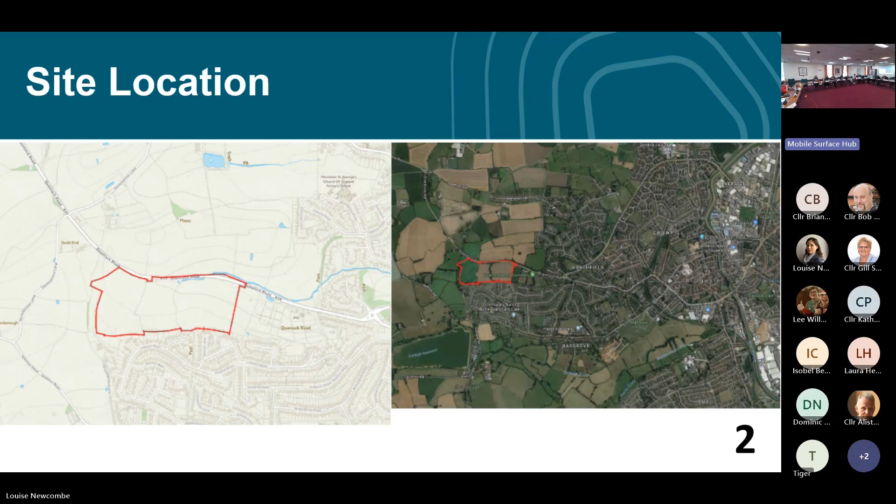This plan shows the current policy position, the fact that it is allocated within the local plan, and that development has commenced to the north. This forms the southern section of the site, showing the proposal in the overall scale of development currently underway.

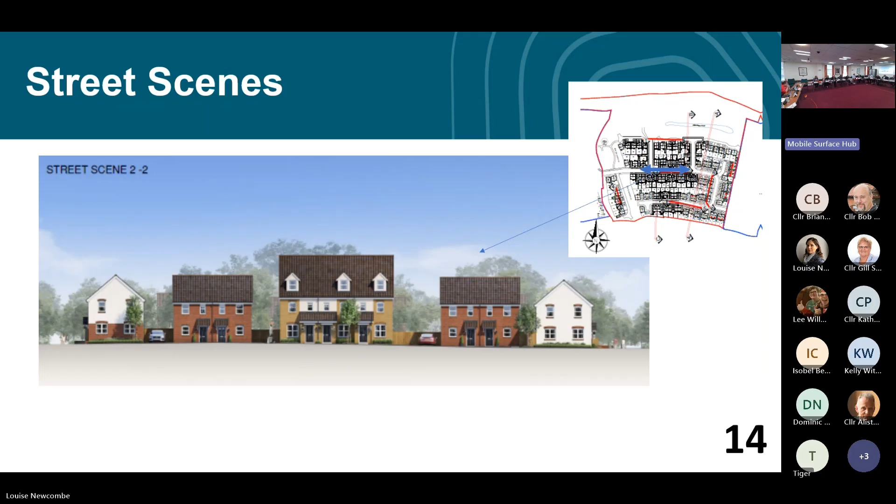The next plan we move on to is street scenes. This street scene is shown through part of the middle of the site, where the 2.5-storey dwellings are predominantly located. It shows an array of units of various sizes and types. The blue arrow on the plan inset shows that this street scene forms the central area of phase 1 of the application site.

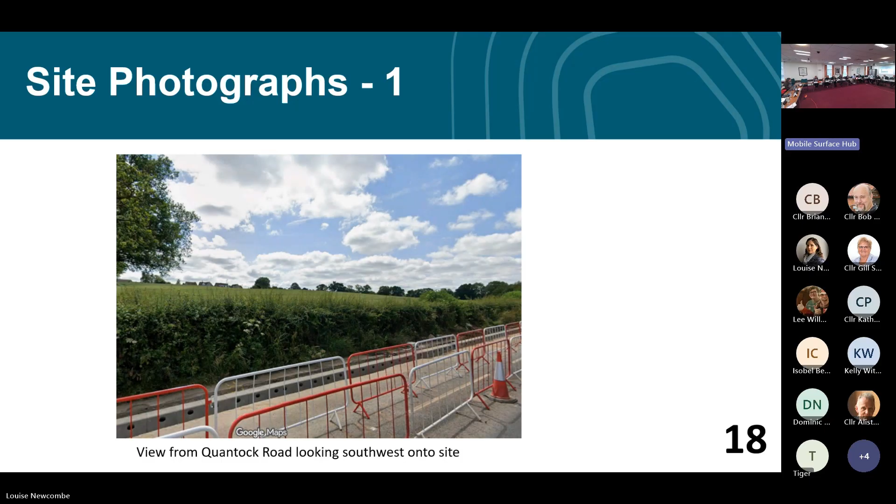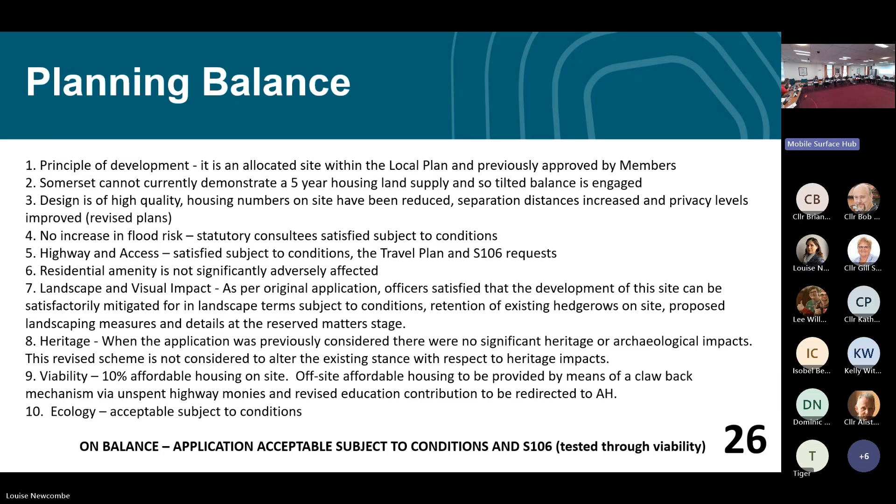In terms of ecology, we had revised plans submitted with respect to updated survey information and a dark corridors plan, and ecology are now satisfied subject to conditions. On balance, we consider this application to be acceptable subject to conditions and the Section 106, which was tested through viability. There are no updates to the report as shown to members.

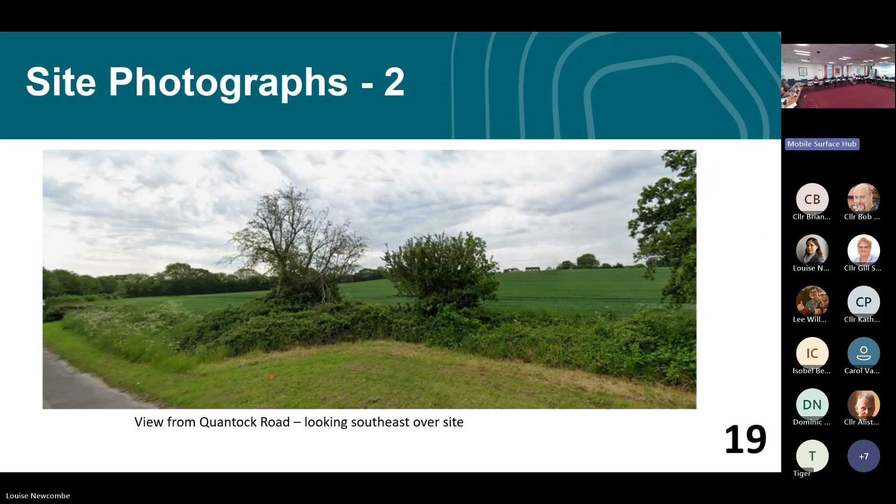First one's a clarification with regard to the 2.4 million, or whatever it was, that was set aside for education. I believe it was on your final slide where there was some calculation made - let's call it 2.4 million that was allocated and then minus 2 million. Can you just clarify what those numbers mean again please, and how much will end up actually in the education pot at the end of it, just for my benefit?

I'll just find the slide for you. So the bit in bold at the bottom.

So as of this year, 2025, education came back as a consultee to say that their costs have gone up. The initial request in 2021 had gone up from 2.24 million to 4.241 million - so between 2021 and 2025, that's how much the education cost had increased. However, in terms of viability, it was recognised that the policy compliant level of affordable housing couldn't be reached, so it was affordable housing that were taking the hit.

From a viability perspective, education were getting their ask, but affordable housing were not. So there was a big discussion around how we could help improve, increase, enhance the affordable housing provision. In combination with senior officers from Somerset, the education team and the affordable housing team, we sat around the table and thrashed it out as officers to see what we could do. The consensus, the agreement with the education team, was that they would forfeit their additional ask between the four years - between 2021 and 2025 - take the 2 million off, so that the education ask is the original 2021 ask.

And that additional 2 million that they were seeking would be put towards off-site affordable housing contributions, and it would be included in a Section 106 agreement - so it wouldn't be anything loose, it would be all done legally, bound, signed and sealed as part of that agreement.

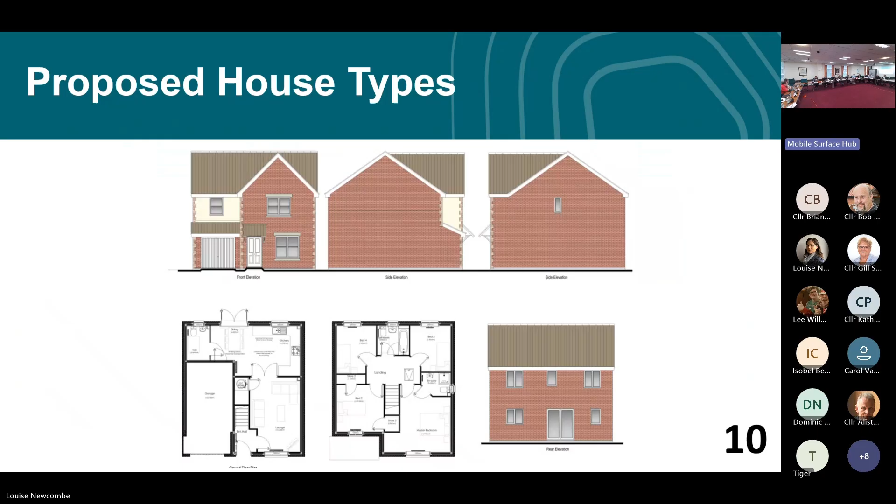It runs more centrally because it goes to the safe signalised pedestrian crossing point, which then leads to further pedestrian and cycle connections being delivered by the northern land parcel. So those connections to the wider area will exist in the future. It's still under construction, so they're not there yet, but the intention is they will be, and the layout of this development has been organised to try and follow that as well.

Thank you. Councillor Bruce.

Not sure if Councillor Phil was before me. Okay, thank you. First of all, apologies for being late today.

I'm gutted because I really wanted to vote on this. I think there comes a point, if I may, when we need to say that we've got to stop giving approval to housing without putting the right infrastructure in place. I'm really, really concerned about this. I've gone through the planning application letters from education and from the NHS, and I'd just like to read them out. Is that okay, Chair? Yes.

Just some sections of them. So in terms of the NHS, when the application was first registered, there was already a direct and identifiable impact on the local primary care provision.

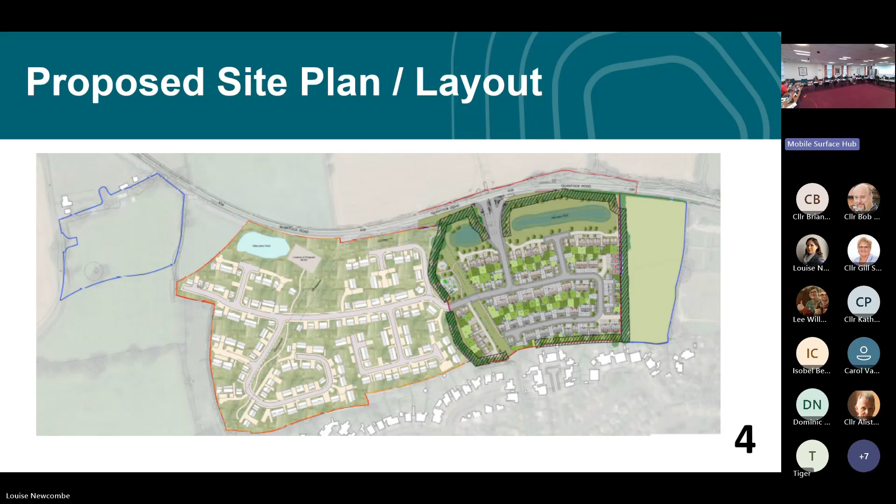Have there been any discussion, and I might be upsetting the local parish council at this point, but I don't know, so I'll just go for it - about redirection of that footpath? Because as mentioned, where it currently sends people over the road is not where the crossings are going to be. If you rerouted it, you could have a much better route through what's being built up, properly lit and not affecting your dark corridors for your nature as well. It just seems to have what was a historic route through what is no longer going to be there. Why hasn't it actually been looked at as a rerouted footpath route?

So on the 2 points - I think the area for spending affordable housing sums is currently linked to the former district geographic areas, so local contributions would go within the former Sedgemoor district area. In terms of the footpath, I think as a matter of course, if this application gets approved, there would be a diversion order applied for, because you'd end up having houses and back gardens going through what is the existing route.

So that said, the internal layout does accommodate for safe pedestrian links from the north to the south and vice versa. As I said earlier, the one bit that's missing is probably the actual connection point from the turning head closest to where the existing access point is. But I think following the debate from members, if that's something members want to push, we can push that through the 106. It would be subject to a diversion order to the extent that it's within the red outline of this site, but we obviously can't divert it outside the red outline of this site.

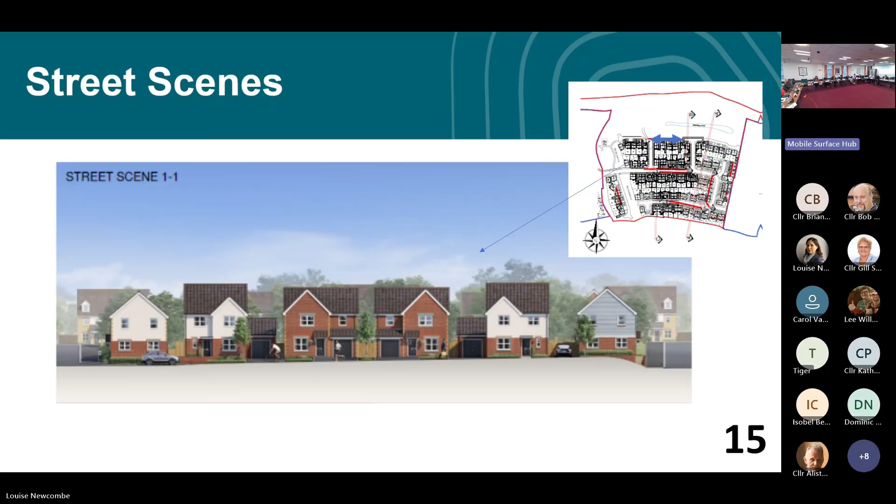Yeah, okay. And so is that something that could be brought up in conversation with the developers during the process? Yeah, in terms of this particular site - I know the issue is almost the dissection of this site from the wider area, but we have to, because we can only consider the applications before us. In terms of the site entrance, I've gone through that quite a lot.

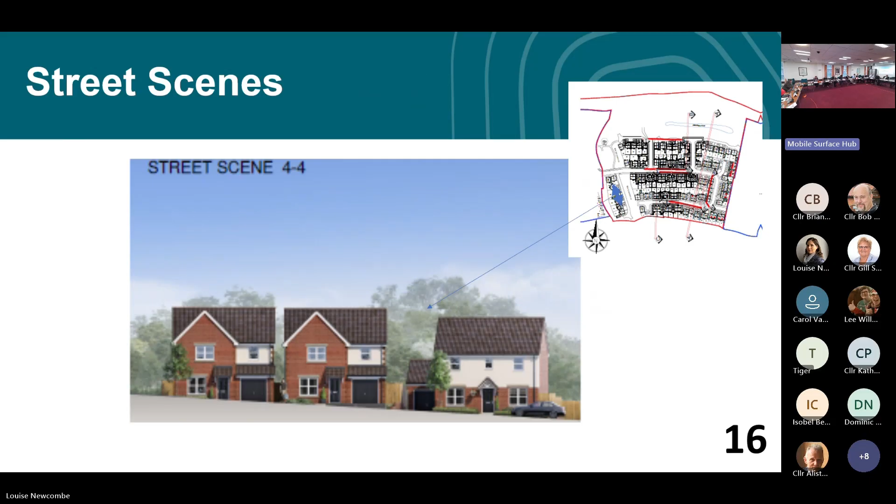I was actually going to ask Louise to go back to the plan she was just on. Oh sorry, I was looking at - sorry, to show you the kind of thing around. Yeah, so the other part is the eastern edge of the site. That's where the second of the two crossing points are. So the issue is really that the front of Quantock Road between the site access and the far east corner isn't very safe.

There's not very much pavement, it's quite overgrown, it's a little bit hazardous to walk. And I've driven it quite frequently, and you're absolutely right - the site entrance is the bells and whistles, signalised crossing, absolutely safe.

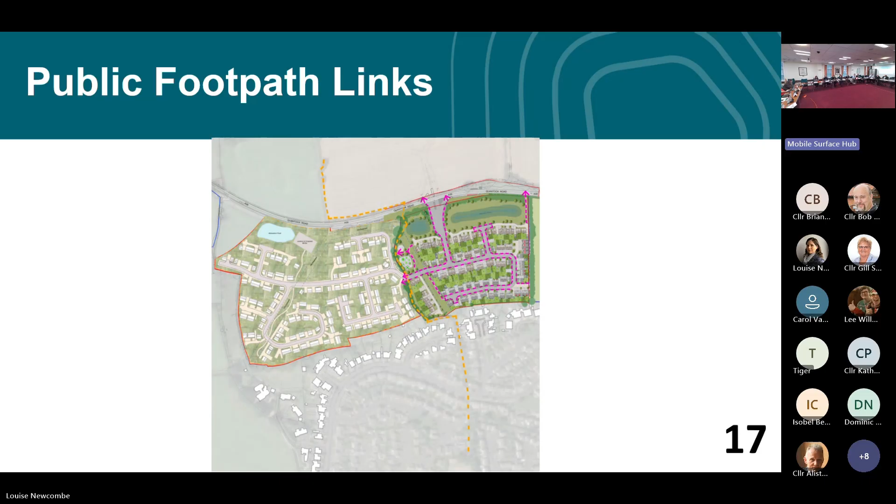The other thing that's shown, that I don't know if members can see very clearly, but there's almost like a red line just in that corner. So in terms of the site layout of this development, there is a footpath shown from the end of that development going straight down, which would then pop you out right where the secondary access is for the scheme on the northern side. So again, it almost removes the unsafe link immediately on the A39 and enables you to get to the crossing point, which would then again on the northern side give you access to the pavements that would then get you through the system as well.

So in terms of how this development relates to wider connectivity, we're happy they've done what they should be doing. My one caveat is that obviously it doesn't quite connect with the public right of way at the top end of the site, but we can cover that with the additions that you've already voted on. So thank you.

That's useful. So the second one I had of three is a comment with regard to Councillor Filmer's concerns with the allocation of affordable housing.

We know that we can say until the cows come home that they'll go to local people, local applicants, but without a valid and up-to-date housing needs assessment in the area, that doesn't matter. So how would we determine whether they're going to go to? It would be in the 106, in terms of the contributions set out in the 106. So then it becomes an academic procedure rather than actually knowing that Bill Niggins needs a house and making sure he gets one.

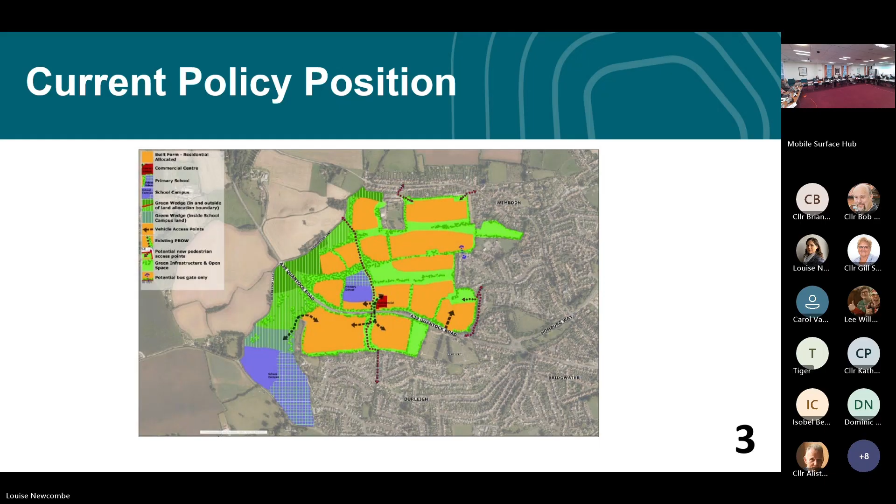All those in favour, please show. No. 11 for, those against, that's 1. Any abstentions? No, and bearing in mind, Councillor Bruce is unable to vote.

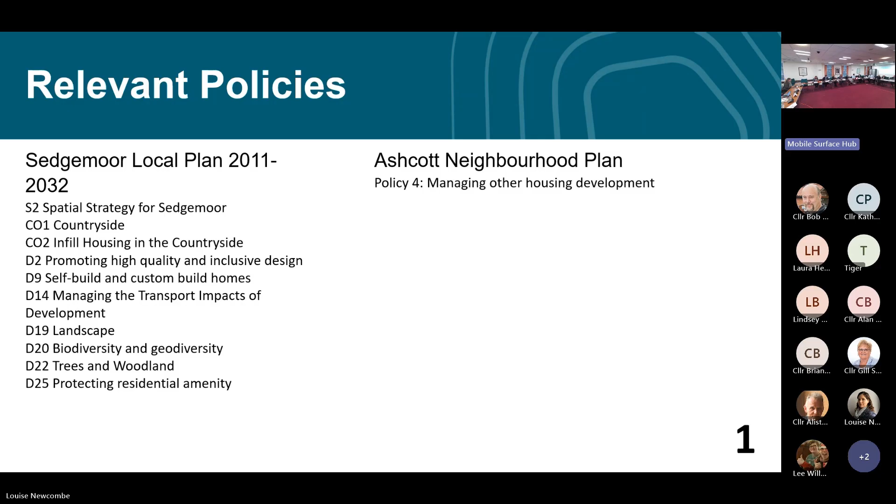This slide here shows the relevant local and neighbourhood policies. This slide here shows the relevant planning guidance and main considerations of this application.

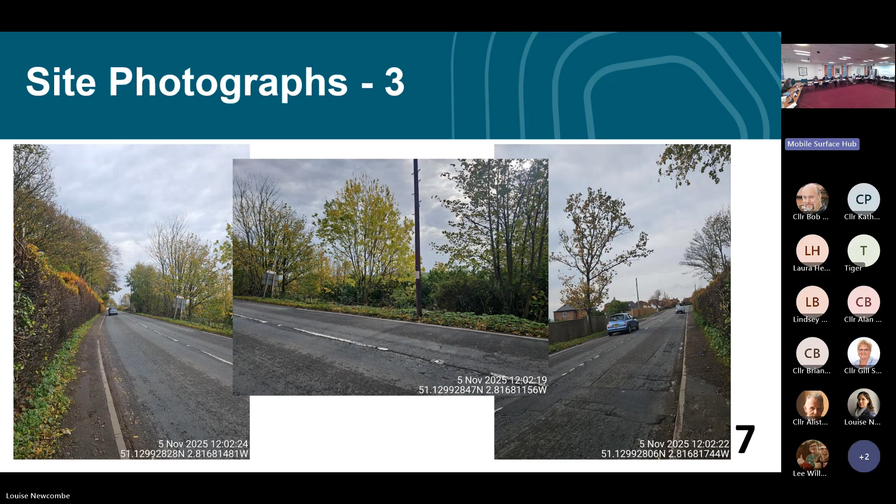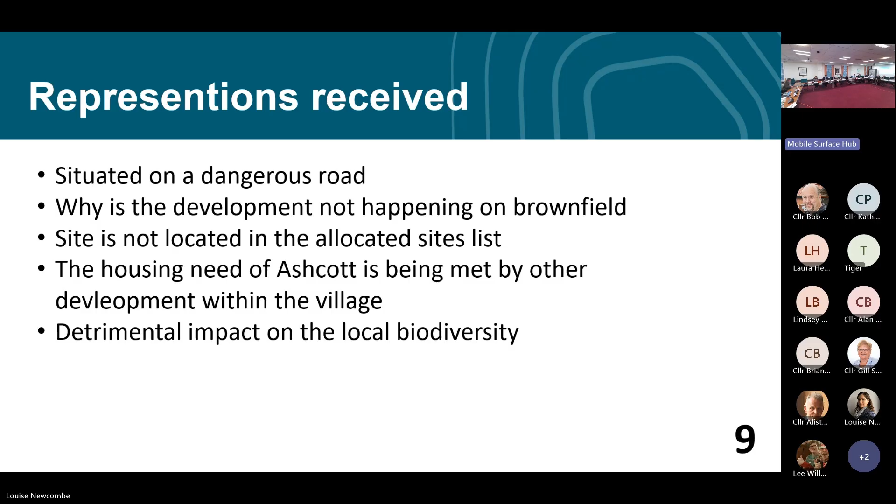On planning balance in principle, as the development is situated outside of Ashcott, it is therefore considered countryside development and must comply with CO1. The proposal has been submitted as an infill proposal and must therefore comply with both CO2 and D9. It's considered that the development is infill due to the number of surrounding dwellings and buildings.

As the proposal is with all matters reserved, a limited assessment can be made of the implications of the proposal on the surrounding landscape. It is considered that the proposed site is surrounded by residential dwellings to the north, east and west, and is therefore not out of character from the area.

As the application is for outline consent, there is no need for the applicant to demonstrate a local connection. However, as this would be required at reserved matters stage, there must also be a residual demand for self-built plots in Ashcott, as long as they can demonstrate a local connection.

The parish has a demand for 5 self-built plots, with planning application 0125-6 recently granted for the outline of 3 self-built plots, and therefore this proposal would be considered for 2 self-built plots, meeting that residual need. This was confirmed by our policy team during the application.

Ashcott Parish Council objected to the proposal, as they considered the site could not support 2 self-built properties on this plot, but would be open to a single dwelling. However, it's considered that from the submitted proposed site plan, each dwelling would be supported by sufficient amenity space that would not have a detrimental impact on the occupiers, or lead to a cramped environment or overdevelopment of the site. Therefore, it is considered to comply with CO1, CO2 and D9.

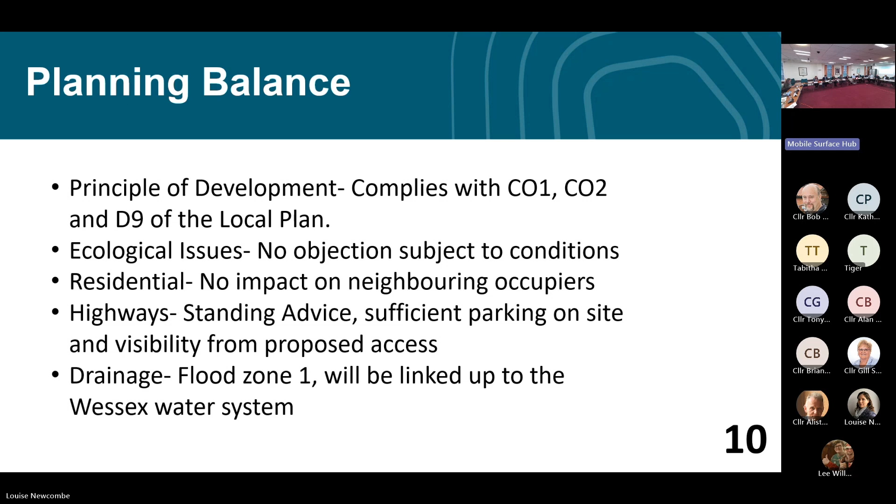In terms of drainage, it's situated within flood zone 1. However, it is in the Parrett catchment area for phosphates. The proposal indicates it will be linked up to the main Wessex drains, and as such it's acceptable.

Updates to the report: please note there is a slight typo in the planning history regarding planning reference 012424, which should read 012124. The biodiversity net gain informative will also be attached to ensure compliance with legislation. Condition 1 has a formatting issue, which will be rectified prior to determination if the application is granted.

Overall, it is considered that the proposed dwellings are acceptable as infill self-built dwellings, and will not have a detrimental impact on residential amenity, nor a negative impact on highway safety, ecological networks, or drainage. Therefore, the recommendation is to approve planning application 012513, subject to conditions and a legal agreement.

I will now pass over to Dawn, who will explain a recent appeal outcome.

Thank you. So as part of the appeals catch-up at the end, I'll try not to drop too many spoilers. But we had a self-build decision come back from the Planning Inspectorate. This basically said that a condition wouldn't be sufficient to contain the development as self-build, so it should be secured by a 106 agreement or a unilateral undertaking.

So the council has changed its approach. Some areas of the authority were already securing self-builds through 106. So universally now we will be securing self-builds through 106. It's a slight change of approach. I know there were quite a few self-builds that came to committee last month, but going forward, applications for self-build development will currently have a relatively short and hopefully succinct 106 agreement.

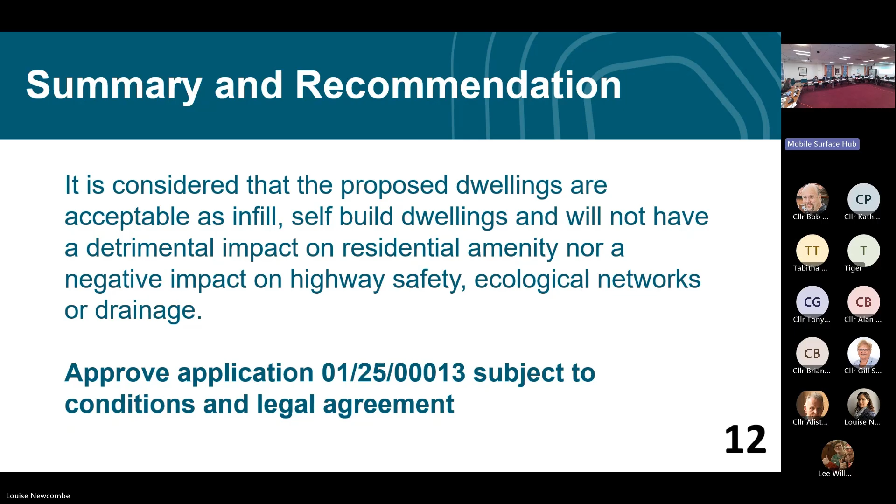Thank you. The application is for outline, so at this stage we're just looking at the principle of two dwellings. Can you flash up the site location plan? Effectively, the question we're asking at this point is, do two dwellings comfortably fit in this space? So in terms of outline, it's just does the principle of two fit in this space. What they look like, where they sit, how big they are, and what they look like all comes as a reserved matters application, which will be a second application after this one.

Because of the self-build requirements, there is a requirement for a local connection. So whoever ends up designing them needs to also demonstrate they've got a local connection to this area to comply with the self-build requirement. So at this stage it's just outline planning permission, so the question is, do two fit in here. So that's the indicative layout, but it's not the consented layout.

Can you go to the previous slide that shows it in the wider area? So again, you've got built-up development to the left, you've got built-up development to the right. So for us, in terms of the self-build guidance, is this an appropriate infill space? I think the initial application, the first reference number we had for self-build, was for a single dwelling. We as officers felt that a single dwelling in this space was perhaps not enough because it felt like it was trying to stretch to fit too big a footprint, but we're quite happy that two would quite comfortably fit in that gap, though the detail would be subject to a future application.

Madam Chairman, sorry, I'm not trying to be difficult, but so we don't know what it is, so they'll come back again to committee, or they could go through delegated. We won't have an opportunity to actually say we like the look of this, we don't like the look of this, it's not in keeping with the surrounding area, but we're actually giving them the go ahead to build anything they like - it could look like a spaceship. I just don't feel that's right, intuitively.

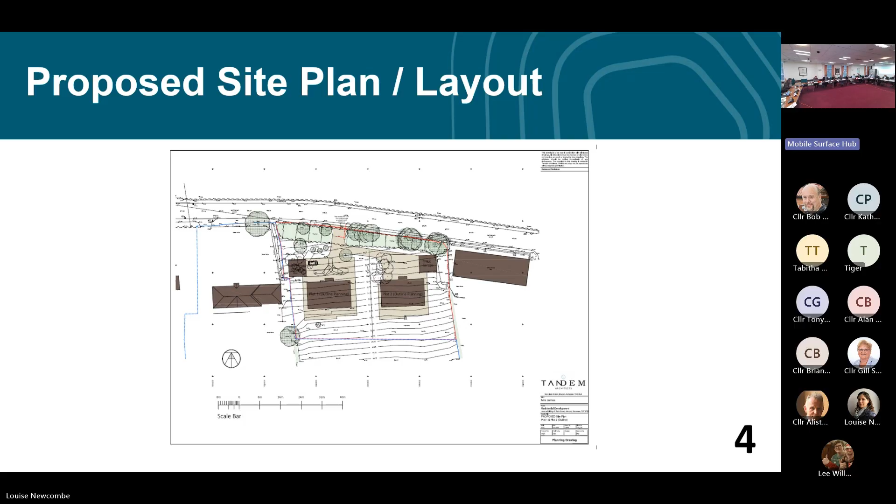Thank you, Chair, I'd like someone to propose something. Yes, I'll propose the recommendation. Okay, thank you. So proposed by Councillor Filmer, with the conditions, 106 conditions around self-build and BNG, which I'm really pleased to see.

Councillor Hendry, you did have your hand up first. Somebody else wants to second that, sorry. No, I'm happy to second it, but you were first. Okay, it's fine, I was just being too polite, but that's fine.

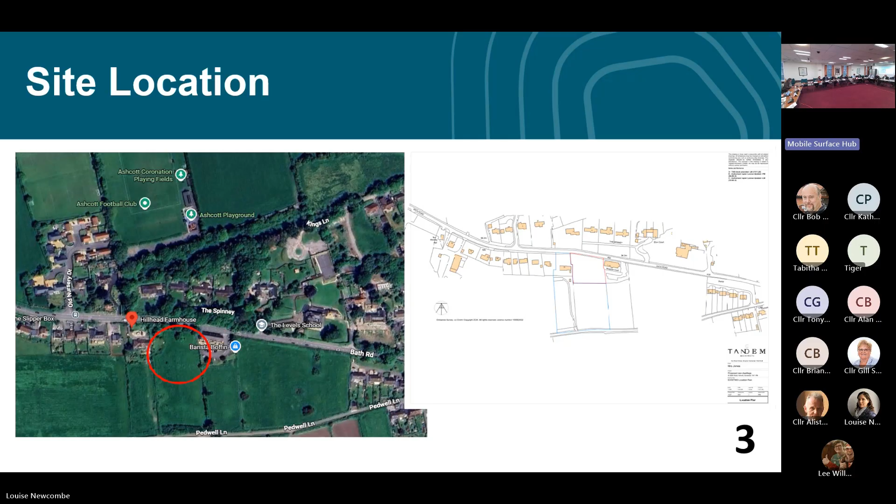So we've got a proposal and a second to approve the officer's recommendation. All those in favour, please show. And those against? And abstentions, one abstention. Can we just give a count of how many were? Yeah, 20, thank you.

Okay, so just give a few moments for officers to move to the next application, and then we'll be on the final application for the afternoon. Retrospective. Trying to.

Okay, thank you. So we're now on agenda item 7, which is the application for Chestnut Cottage, pages 117 to 132. Eleanor, would you like to take us through, please?

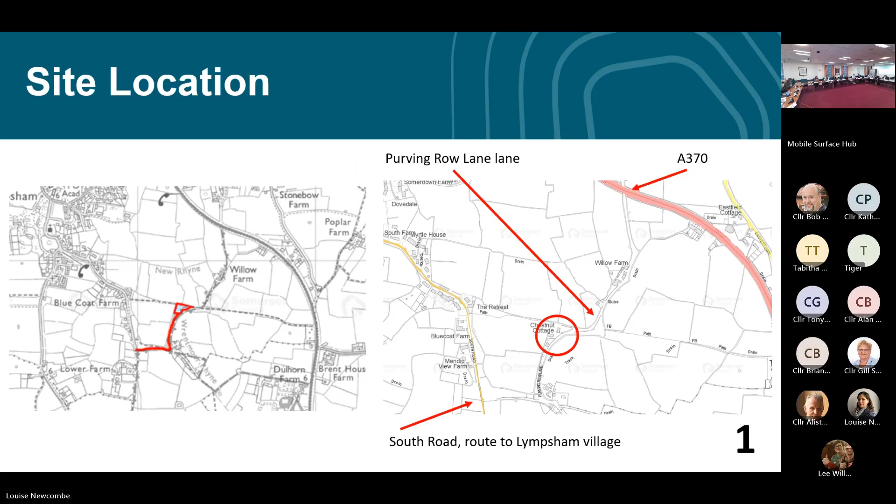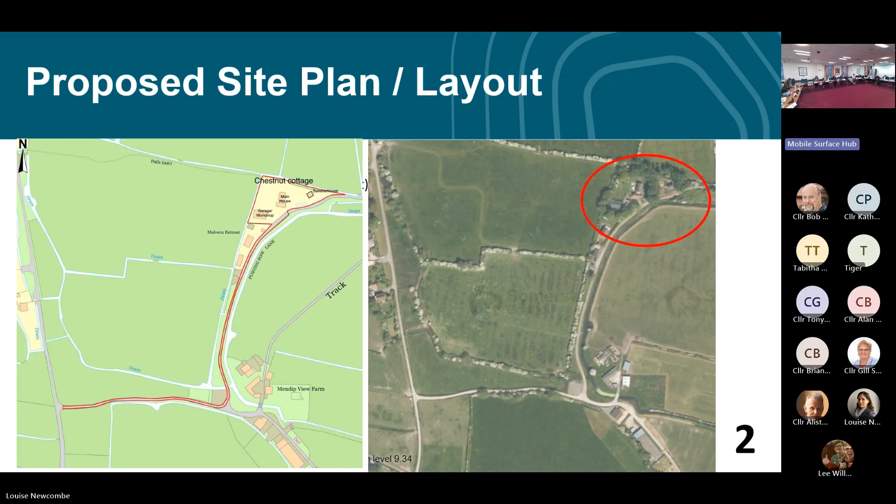So this is the proposed site plan. The proposed summer house is in the residential curtilage of the main dwelling, Chestnut Cottage, and on the right-hand side is the aerial view of the site. So that's the proposed summer house, which is existing.

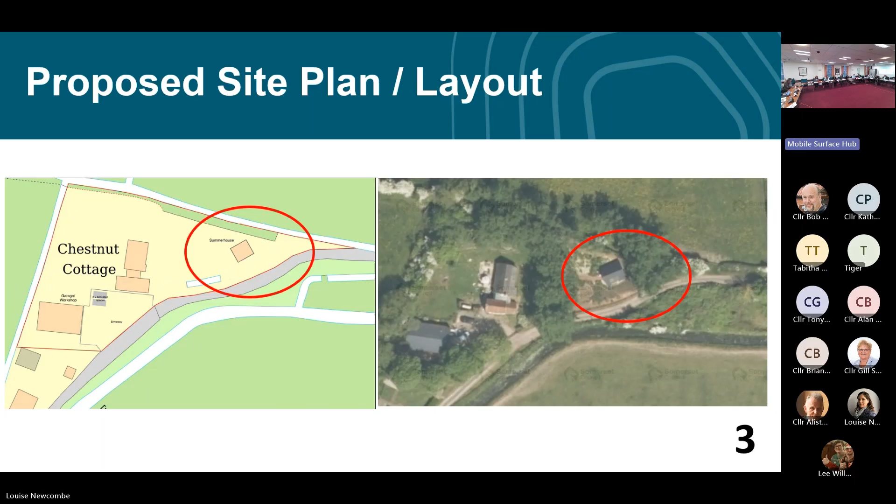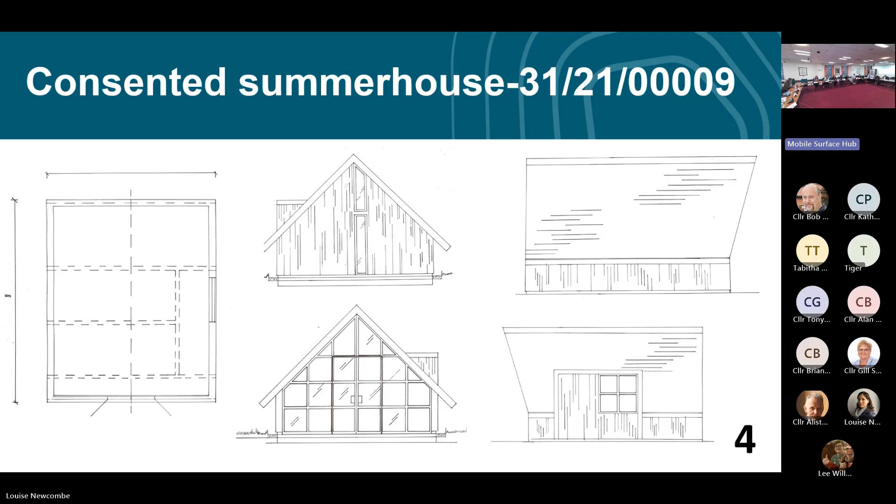So this was the consented summer house under 3121-00009, consented a couple of years ago, subject to conditions. This was for a domestic summer house to be used by the users of the main dwelling. The applicants commenced use of the summer house as a holiday let in summer 2024. But the summer house planning consent contained condition 3, specified on the presentation, which said the building hereby approved shall only be used for activities ancillary to the existing dwelling house on site, currently known as Chestnut Cottage, and no part shall be used, let, or otherwise disposed of as a separate unit of accommodation.

The applicant submitted a certificate of lawfulness to regularise the use as a holiday let. However, because of this restrictive condition, it was considered this route couldn't be used to regularise the use of the holiday let.

So they submitted a full planning application, which is what we have in front of us. This was submitted and needs to be considered against the relevant policies in the local plan. The main considerations would be the principle of development.

Policy CO1 in the Sedgemoor local plan permits buildings in rural locations, provided there's a justified need. Policy D17 in the local plan also permits buildings for tourist development, provided there is a robust justification and it's viable. This is already an existing building, so it's a reuse of an existing building.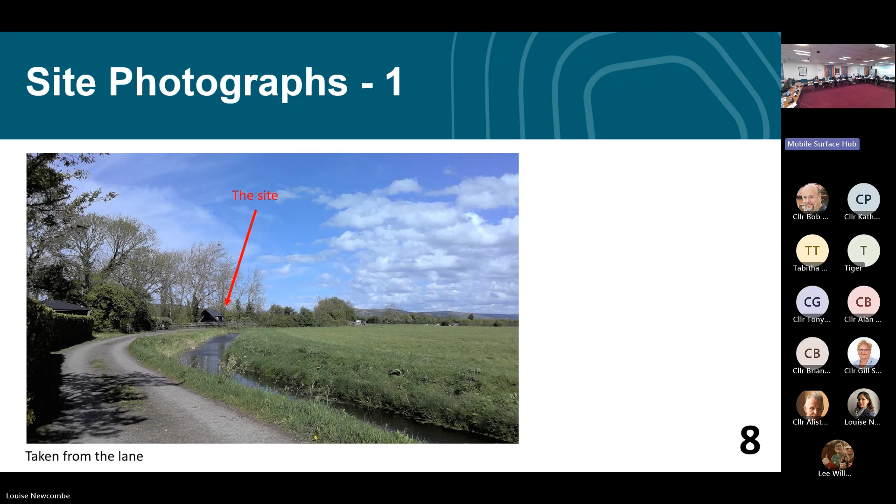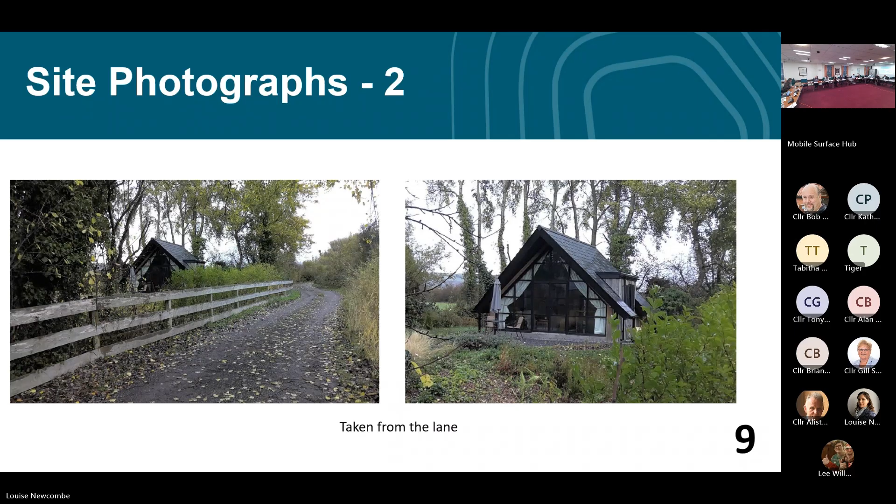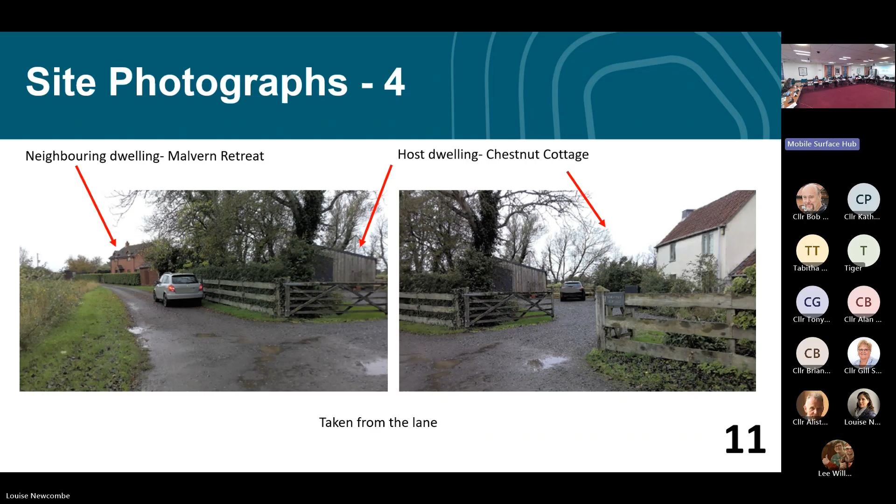This is the site from the adjoining carriageway. You can see there's boundary treatments that somewhat screen the site. Those are some close-up photos of the proposed building. This is the nearest neighbouring dwelling, the existing host dwelling, and the proposed parking area. And this is the host dwelling.

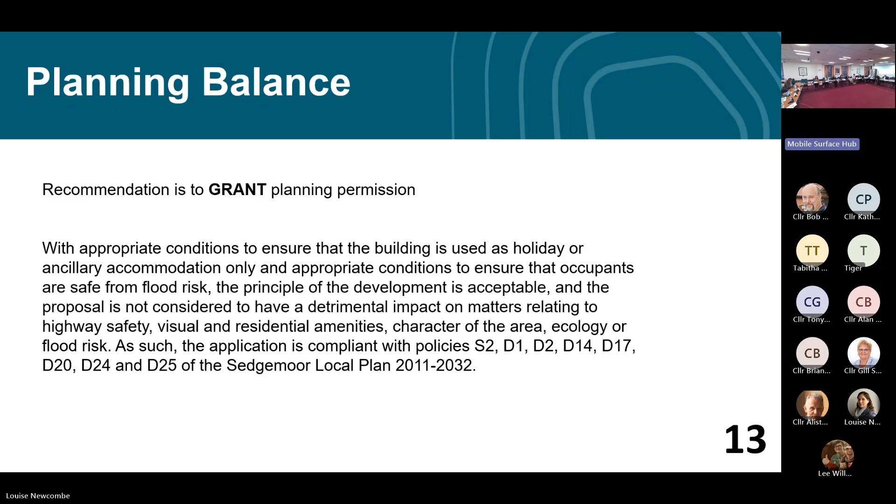So the recommendation would be to grant planning permission as the proposal would comply with the relevant policies in the local plan, subject to the below conditions: in accordance with the approved plans, that it will be used as holiday or ancillary accommodation only, and the development will be in accordance with the flood risk assessment and the flood warning and evacuation plan.

That concludes the presentation. Thank you.